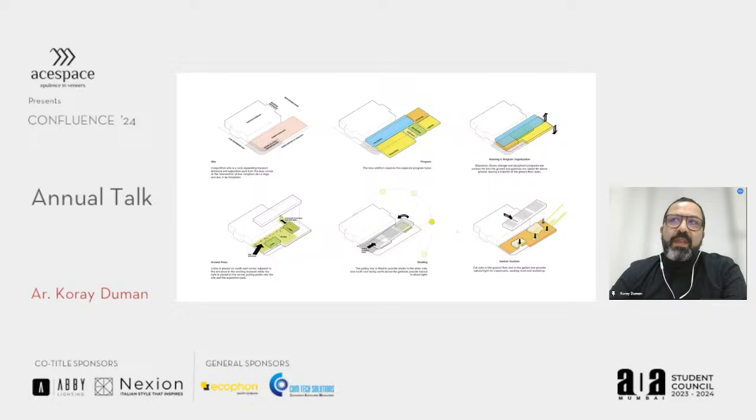Finally, we created sunken gardens into the basement so that natural light can reach the classrooms, reading rooms, and workshop in the basement programs.

This drawing shows the entire ground floor of the site as well as the adjacent park. The new design of the contemporary art wing provides a social landmark, a place for civic engagement, and a new kind of public space. We envision the ground floor as a collage of landscape and paving where many different public programs can happen throughout the day, with the galleries sitting above, creating shade for them.

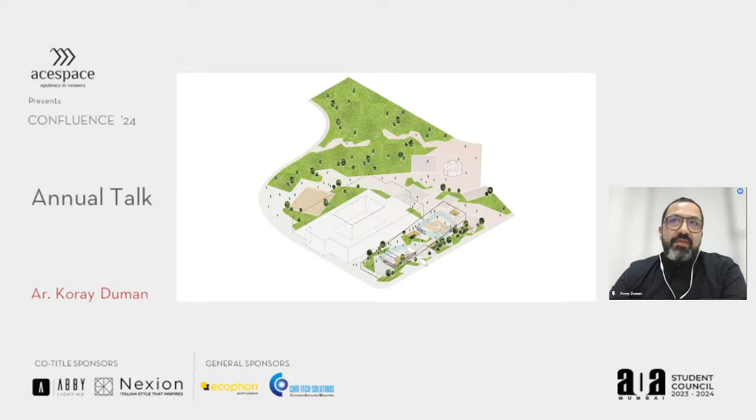What you see here are the floor plans. The one on the left is the ground floor. As you can see, the footprint of the museum on the ground floor is very minimal—these are sculptural boxes for the cafe, the multi-purpose room, and the entrance, with the entire space open to the public as an extension of the park.

The second image in the middle is the second floor, the elevated gallery box, which provides unobstructed spaces for contemporary art exhibition. On the right is the basement space, containing art storage as well as classrooms and education spaces, where sunken gardens provide lighting to the classrooms and educational programs.

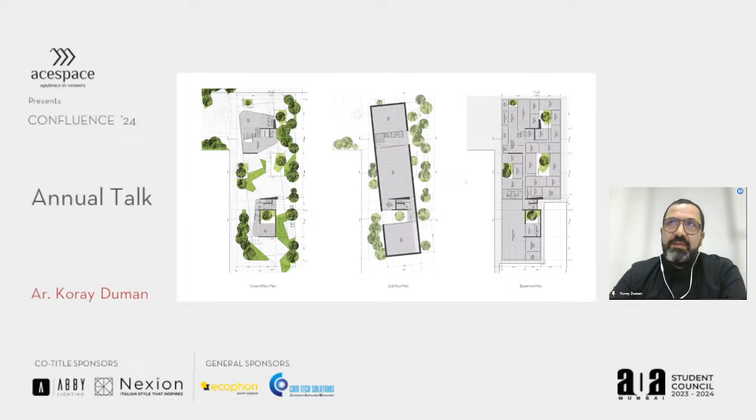The final design shown here is the view from the busy corner. On the left you see the existing museum, and on the right you see our new addition, where you can see the elevated gallery box and the public space extended underneath it towards the park and the entrance of the museum.

This other view shows one of the gallery spaces, with the north-facing sawtooth roofing positioned directly towards true north to bring indirect light into the gallery spaces.

Another competition we did was part of Europan 13 in 2015. The theme of Europan 13 was Adaptable City. The particular site is in Turku, Finland, and the site had an emphasis on densifying a 1960s housing area.

The site shown in the slide given to us is marked with a white outline. It's actually two sites interrupted by a continuous road—two corner sites proposed for this competition. The site is adjacent to the University of Turku, the student village, and a commercial center.

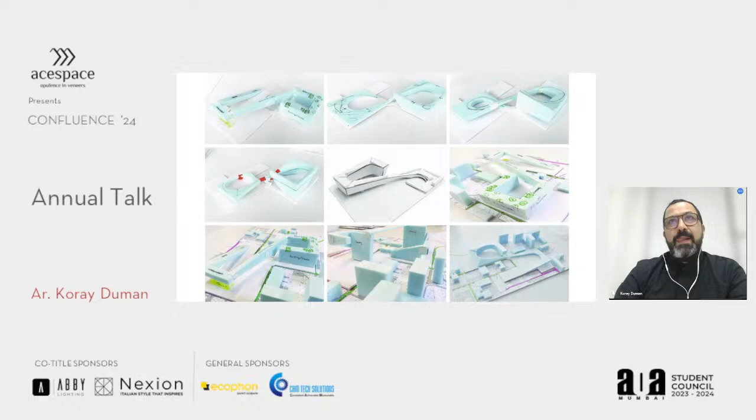I will maybe explain more here on this rendering. The project starts on one side at the ground floor as a big landscape that lifts up. And as the landscape goes higher and higher, it becomes the roof garden above the entire building. At the middle of the site, it turns into a bridge that goes above the road to create this continuous superstructure. The way the project works is explained in these diagrams.

The program for the project was to provide dormitory for students, housing for elderly, as well as a restaurant and public spaces in the ground floor, and educational programs for the study areas for the students.

The way the program works is that we place the family residence, which is for the elderly, in the lower volume on the bottom part of the structure, as well as at the end of the taller part on the other side. The darker gray area you see on this diagram on the upper left is occupied by students.

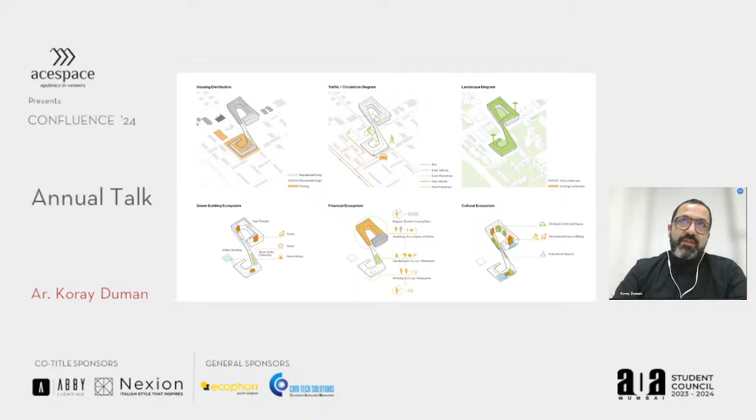The way the project works is that the entire roof is a continuous park where you can access individual floors through these roof terraces. It also provides a cycling path through the roof to each floor, as well as provides green roof space. The idea is that this can actually provide spaces to produce products for the restaurant and the urban farmers market that is underneath.

This was the final project for this competition for our proposal. And these are two views that show the project.

The top view is on the street level. You can see that the superstructure goes over the street, and the area that is the bridge is where the study area for the students is. The higher portion that you see in front of us on the right is where the elderly housing is occupied.

The bottom view that you see here shows the continuous roof that people can walk through into their apartments in each floor, as well as the greenhouses that will produce the products for the restaurant and the urban market below.

There is also the idea that the university was thinking about where if we were to put elderly housing with student housing, it might help in two ways. One of them is in Finland, in Scandinavian countries, they do multi-generational housing where the students take care of the elderly and make income from it, while they also learn from the experience of the elderly. So the university was looking at a combination of this multi-generational living that would really help both generations.

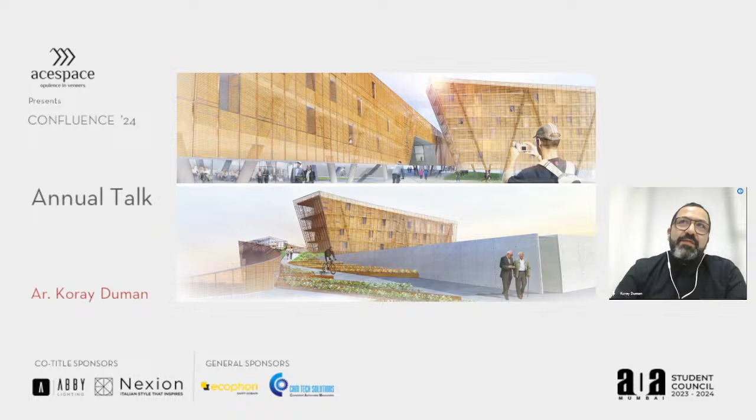Some of the things we found in 2016 were really interesting. One was that an average American adult spends 54 minutes a day commuting, and more than 11 hours a day staring at screens. They usually have 1.4 friends and 338 Facebook friends. Another interesting statistic from America was that American adults spend about 5.6 hours per day browsing images. We also realized that people can browse about 1,500 images per hour, and browse approximately 8,600 per day.

Some of the problems we realize about doing architecture in a global world, practicing in different places and doing projects for sites we're not really familiar with, was that we realized we are actually becoming part of this culture. What we were doing was not working on physical public spaces, but really producing images for the digital world and social media. This was also during a time, interesting enough, around the 2016 United States election.

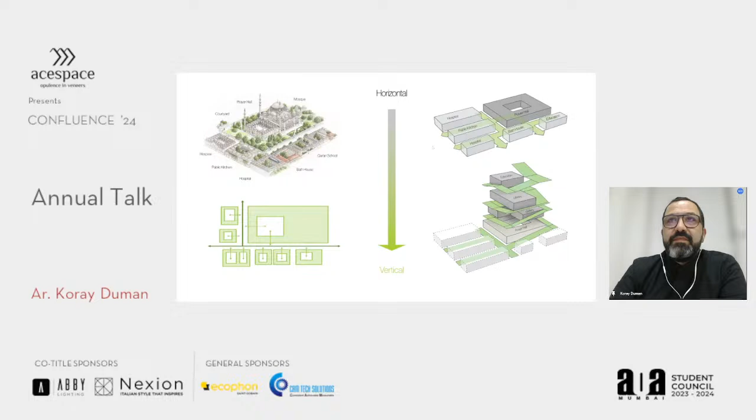The way Külliye's work is that each of the buildings is connected with each other through streets. If we were to take these programs and put them on top of each other and create a vertical street that goes around them, that might be a way of introducing a new kind of public space in New York City.

Another thing we did with this nonprofit is really look at what kind of programs they needed. It varied tremendously. They needed educational programs like nursery, preschool areas, classrooms, lecture halls, an auditorium. They really needed recreational spaces including dance studios, yoga studios, martial arts, gym, fitness areas. But they also wanted a culinary area with a restaurant and cafe, as well as cooking classes, and art, culture, and social programs providing contemporary art spaces, exhibition spaces, auditoriums, and permanent galleries.

We divided these spaces into two: informal spaces and formal spaces. The informal spaces are more public spaces where people can wander around, including cafe, restaurant, retail, exhibition, or the library. Whereas formal spaces are more defined spaces for one specific program, including athletic facilities, classrooms, offices, and so on.

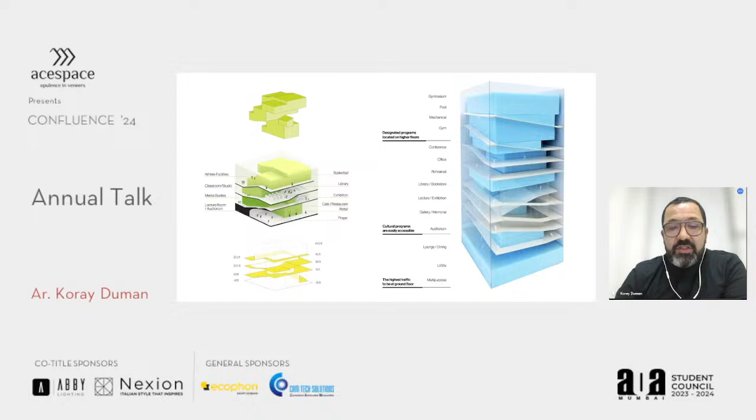The idea was really, how can we create a new kind of public space that will let people wander around, discover new things, as well as have chance meetings with fellows coming from other parts of the world who also share a common religion with you.

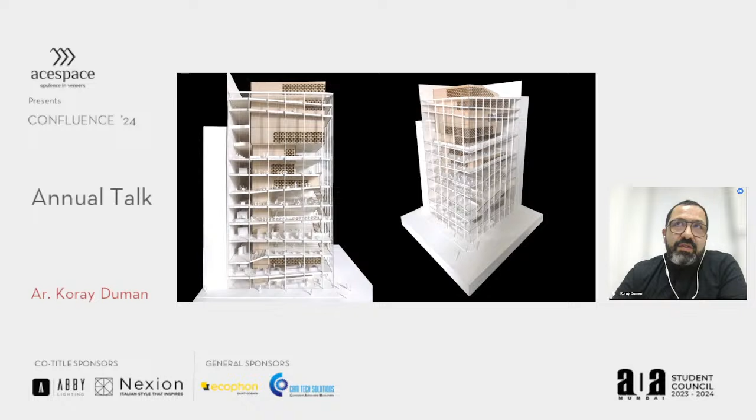This is the final project, the model. You can really see this informal space that wraps around the building and the transparency around it that shows the extension of the public into this vertical space. This is a detail of this informal public space that wraps around the inner walls.

Second project we did was called Under the BQE. BQE stands for Brooklyn Queens Expressway. One thing we realized in New York City, probably common in a lot of other big cities, is that New York has 300 miles of elevated infrastructure, usually for highways or subway lines. The ground floor space underneath this elevated infrastructure is usually used for parking or is no man's land. Even though people can walk underneath it, it also divides neighborhoods.

We realized the space underneath this elevated infrastructure has a lot of potential and is really an overlooked public space. We wanted to take one portion of it and do a test element. The BQE, Brooklyn Queens Expressway, is widest in Brooklyn where it goes through. We thought it would be really interesting to pick a site next to a big complex, the blue area you see here called Industrial City.

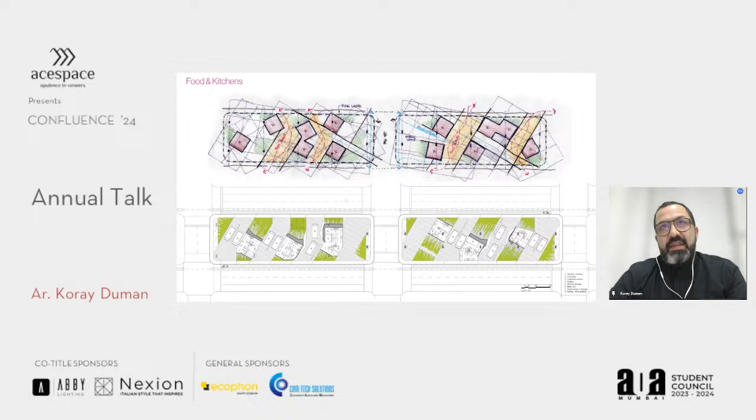One of them was to think about a floor plane that provides parking for food trucks as well as areas for commercial kitchens. The idea was that during the morning they will produce food for the food trucks, and when the food trucks leave to go to their destination during the day, the area that was for parking can turn into public space, and people who work around the complex can come to have lunch. So it has this double purpose.

The second project that we looked at was this as a sports complex. If we provide a gym and basketball, football areas for the neighborhood, that can actually be really useful in two ways. One is it can be used by schools during the day, but at lunchtime, in the morning and in the evening, it can be used by the people in the complex.

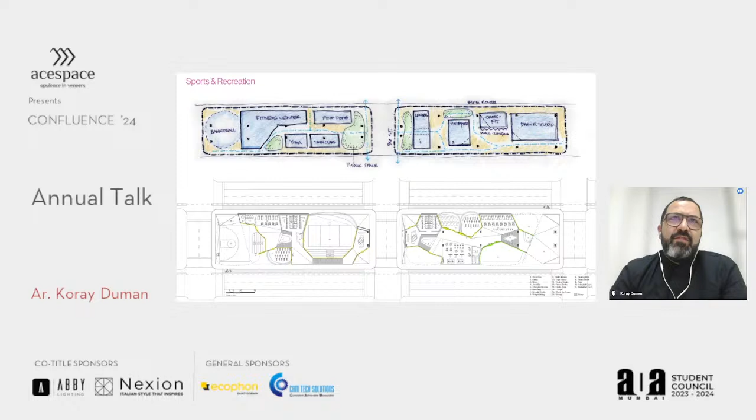And when we were looking at these, we also wanted to think about what are the different formal experiments that we can do that will help us think about new kinds of public spaces.

For the second proposal, we were also looking at the idea of a sport facility. One thing we realized is that if you do high intensity workout, because of the heat you produce, you don't need to be in a conditioned environment except when it's really cold, which is 2 months of the year. Besides that, if you have a covered shed above you, you don't really need an enclosed space to play basketball, tennis, or do high intensity workouts.

One of the ideas is that we create areas that are open most of the time, but also have these inflatable structures. So when it's really cold, these inflatable structures create heating, but otherwise it will just be open spaces for people to do their workout. There are other volumes that are more permanently enclosed for changing rooms, cafeteria, and also smaller workout areas.

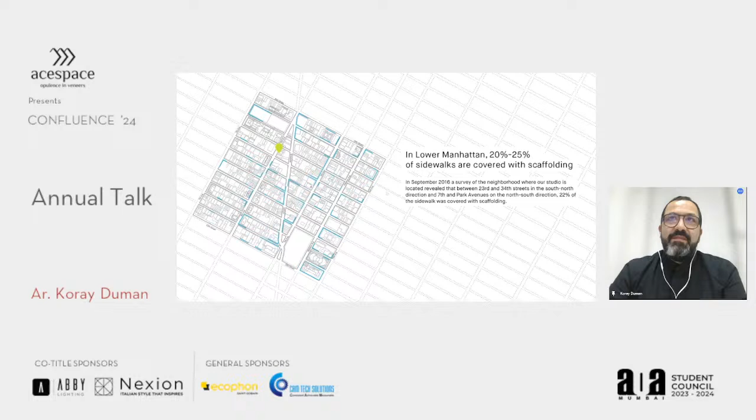But one thing we also realized in New York City is that scaffoldings are not only used for new construction, they are also used to inspect facades of old buildings, and facades of old buildings in New York City need to be inspected every 5 years. That's the reason why there's so much scaffolding in New York City, and sometimes these scaffoldings can stay more than a year or so on the sidewalk.

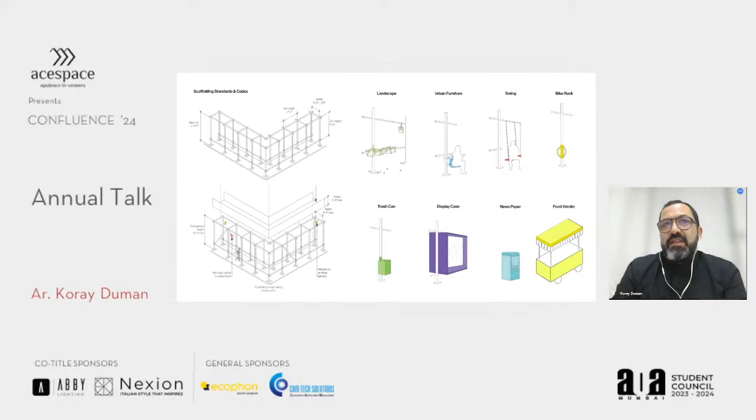So some of the things we started thinking about is, if we have to look at scaffolding, what are the other elements we can put into them? Can we provide landscaping, urban furniture? Can we provide bike racks or trash cans or even newspaper stands or food vendors? The project I'm going to show now is 2 options that look at alternatives we can think about for scaffold.

Some of the sketches we did were, what if we actually just use them as diagonals so that it will be much more efficient than the simple column and beam structure we have, but at the same time these diagonals can hold some public furniture. Or what if these are collapsible structures that don't really need to be individual elements, but come as sections that can unfold or fold back again quickly so that the assembly and disassembly time can be reduced.

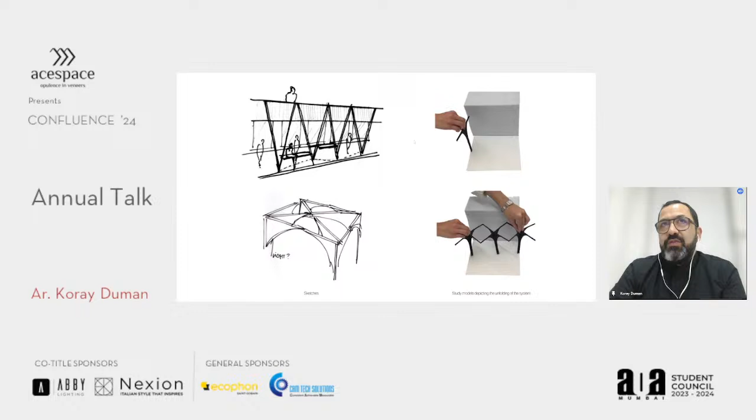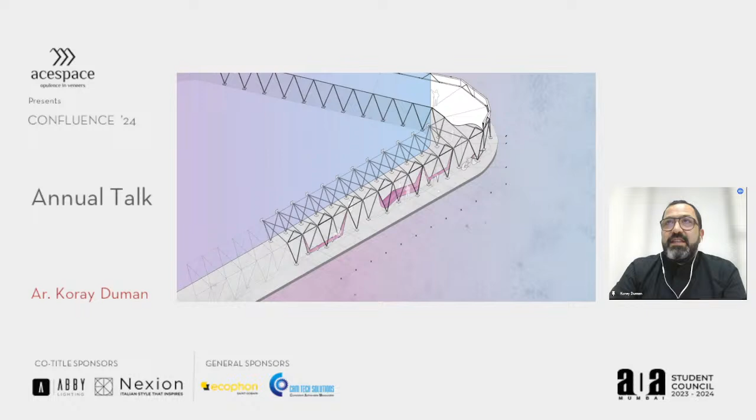So the first option you see here was the option for the diagonal elements. Here you can see how plug-in benches or bike racks or stands can be incorporated into the scaffolding to make it more of a public space for city dwellers. This is a view of the same one from the sidewalk.

And the other option is, what if it was these collapsible structures that really get support from the center, but can also be attached to the buildings or have secondary support on the sides. With these structures, another option beside benches or bike racks is that we started thinking about plugins that can be used, paper stands or other types of projects.

The interesting thing about all of these projects is that it started to give some recognition to the office. So we started getting invitations to propose temporary public installations in New York City.

This led us to start thinking about much smaller projects as well. Another thing I want to briefly mention is that this actually ends up really useful for the build projects we do in the office. This is a very small project we did in 2017, right after that research we did about it.

It is for a creative agency. This creative agency has a very small floor space, 1,000 square foot, which I believe is less than 100 meters square. They had a lot of needs they wanted to fit in: 12 desk spaces for 12 people, a private meeting room, a kitchenette, and a secondary informal meeting area. What we thought is, maybe what you see here is the plan, which is a long rectangle with windows on one side and a door on the other side.

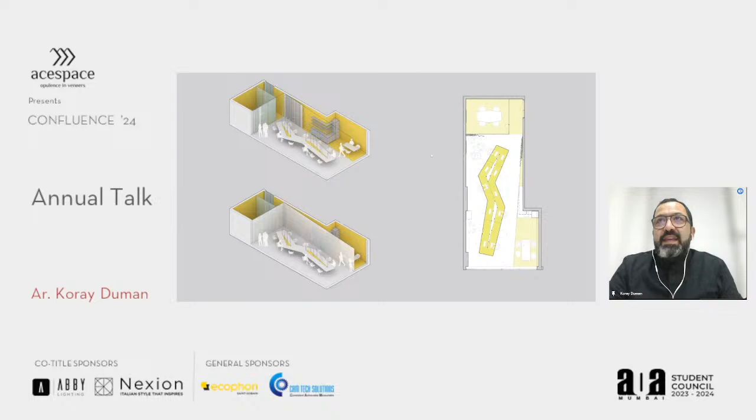And then we introduced two ideas here. One of them is that, as a creative agency, they didn't want to have a lot of clutter. So the main space actually has curtains that, if they want, can block all the visual clutter of the meeting room and the kitchenette area, leaving just the main space. And when they want, the curtains can move and it can be a whole open space.

The other idea we had was the desk for the space was going to be so big that what if we use scaffolding poles to float this table so it just looks more ephemeral and light. These are images of the final space. These scaffolding poles actually not only structure but the electric goes through them into the middle, so that any electronic equipment on the table can have access to plug in.

The other kind of thing we started thinking about after the scaffolding was this idea of a modular structure that's almost like an infrastructure that wraps around, that can be used for various different things.

One project during that time was also a cafe in downtown spaces. They wanted to extend this and have it fit into different places. The other idea about the modularity was that this modular structure can also be adapted to different things they want. It can be used for lighting, planting, but at the same time for merchandising, as well as other programs like storage and pickup.

This is the floor plan. This structure was installed in an existing space. It's a grid, as you can see, a modular grid, 3D Tetris that starts at the wall on the left, where you can pick up your food or there's display and storage, but it goes over you and comes down as a folding table for sugar or cups or utensils. This is the infrastructure, this 3D lattice infrastructure that we inserted into the existing space.

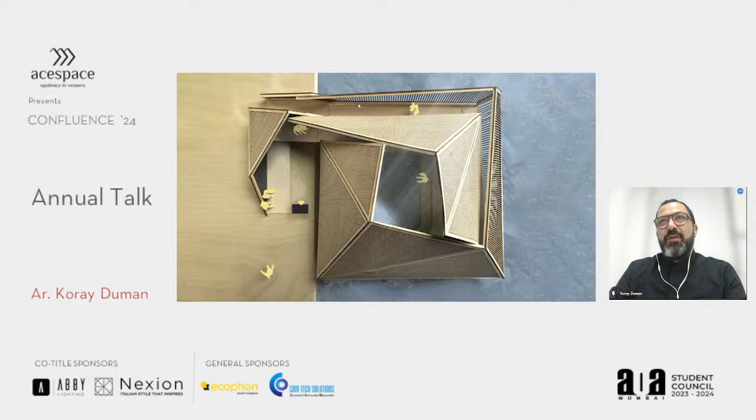This is the side view, and this is the bird's-eye point of view. When you enter the space, all you see is the sky and water. But as you come out of it, the view starts to open up, and as you walk out, you start to see the city and reconnect with it.

The last thing I'll talk about briefly is that some of these design research projects and proposals about public space have been going on in our office for almost 10 years now. But of course, we have another side of the office that does a lot of arts-related spaces: galleries, artist studios, design space, creative agencies, as well as exhibition spaces.

The thing that was always kind of interesting and difficult in the first six or seven years of our practice was that these two parts of the office, even though they sometimes overlapped, were distinct: the build projects and the research projects didn't necessarily always talk to each other. So I want to show two recent projects we are working on.

They are both museum projects in New York City, but they start to think about public spaces in a different way. The first one I want to talk about is the Noguchi Museum, built by Isamu Noguchi, the famous sculptor renowned in the 50s, 60s, and 70s for his public sculptures. The site is in Queens, across from Manhattan.

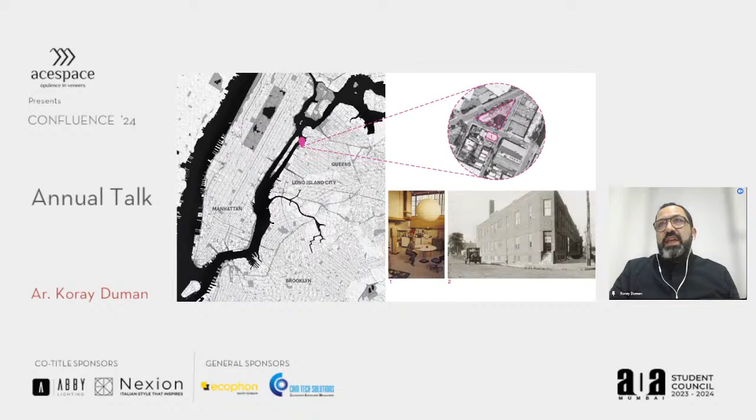So the competition was to build an art and archive building where they could bring the collection back into the museum again.

This is the existing museum, and this rectangle is the existing studio. Our proposal was really to respect the original architecture of the museum and the original architecture of the studio. The museum is very simple.

Isamu Noguchi really designed the museum to use readily available materials—CMU, corrugated metal, steel. That simplicity, and the way it was put together, was very important to him. We wanted to keep that in the new proposal.

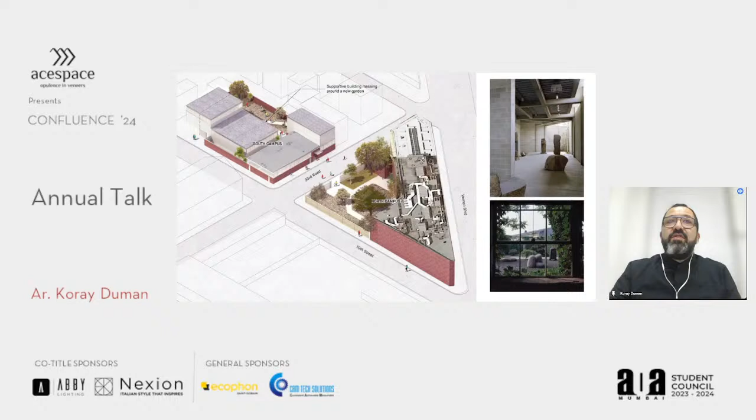The second thing we wanted was for the new building not to look entirely different or like a new addition. One idea was that there is an existing brick wrapped around the existing studio. We extended it on both sides of the building, and slid our building in between those brick walls so it felt like it belonged there.

This is our final proposal: this corrugated building, the existing studio, and the brick wall extending. The top floor is the archive area for education and a research center, and the bottom is the storage.

Our proposal was to renovate the studio so it could open up as a multi-purpose space where the cafe and bookstore will be, a flexible space that can also serve other purposes. The interesting thing about this project was that once the museum realized they would have a big building that is basically storage.

But it can't be hidden away like it used to be in the basement—what could we do to bring new life to this building so it works as more than just a storage space on the ground floor?

So one of the things we worked on with them is that the entire storage space on the ground floor is actually movable—it's on tracks—so it can open up to create events or lectures and talks inside the storage space, and also bring people into the storage space itself.

The studio itself is also a space where we kept the existing skin of the building, the CMU walls and the steel structure as is, but introduced corrugated metal panels that can be used in many different ways, so that it's purely flexible.

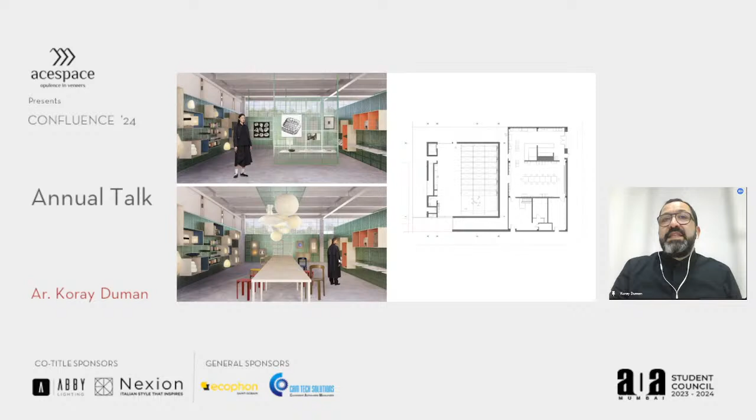It can have boxes installed to show his lamps and furniture that he designed, but it can also become a space for exhibition, or a public space for a cafe, talks, or lectures. The last project I want to briefly talk about is MoMA PS1.

MoMA PS1 is a museum in Long Island City, across from Manhattan. PS1 comes from public school. The building you see here was the first public school of Queens, that's why it's called PS1.

It was abandoned in the 40s, and in the 60s artists started to occupy it as studio spaces. They produced work, they exhibited work here. It was really a ground-up, guerrilla-style exhibition. The city recognized the power of it and gave money, and in the 90s it was renovated into a proper museum.

During that time, the back courtyard, what used to be a parking lot, turned into a series of concrete courtyards that artists and creators can use to exhibit work in the space. In 2000, it was associated with the Museum of Modern Art, becoming an annex of MoMA, so it's called MoMA PS1.

One thing that happened during COVID was that the museum realized they were incredibly detached from the neighborhood because of the architecture. It was covered with concrete walls, and the neighborhood didn't even know there was a museum there. People also felt like when you go inside, it felt like a prison courtyard.

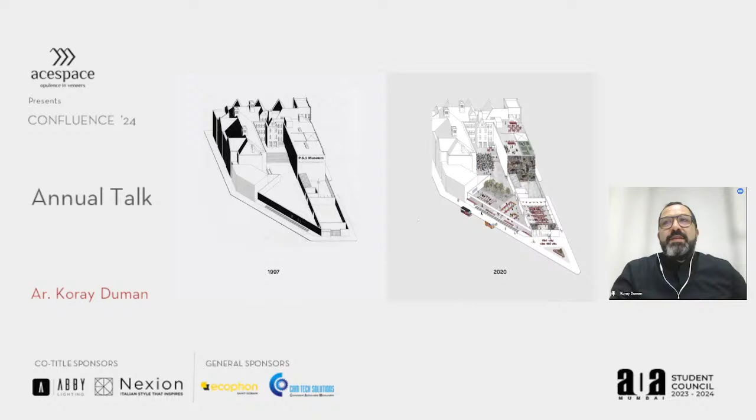From this collage, we are now working on a concept design with the museum. A couple of things we are doing: the entrance will probably be turned into a living room for the neighborhood, with a cafe, almost detached from the museum with separate operation hours. We will also penetrate the concrete wall, installing gates that open it up during the daytime.

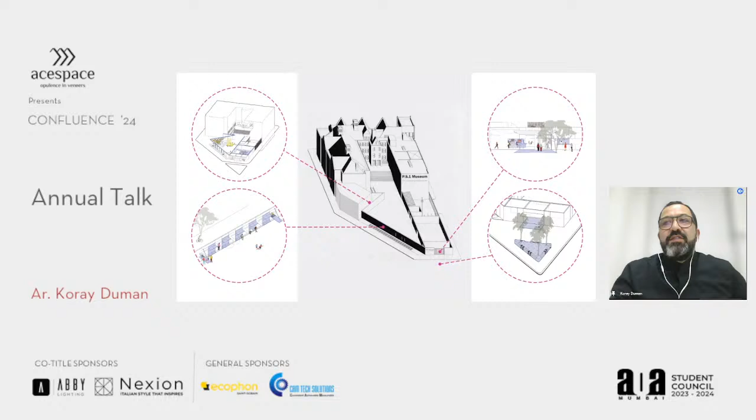The gates themselves will also be furniture. When open, there might be seating, bike racks, or tables so people can occupy it. We also want the museum to extend beyond its walls, occupying the public space in front with more opportunities for seating, bike racks, and public spaces. This is the current scheme we're working on with the museum that tries to activate the space.

One of the things we're also doing is providing a bespoke metal cap above the concrete walls, custom designed so hooks can be installed for shading during the summer, while also providing electricity for lighting or projectors.

The piece itself is very surgical, very small, but it will allow creators to install projectors so they can provide screenings or other programs, so that the courtyard, the front pavilion, and the space in front of it really start to belong both to the museum and the community.

This is kind of all the projects that we had that I want to introduce here.

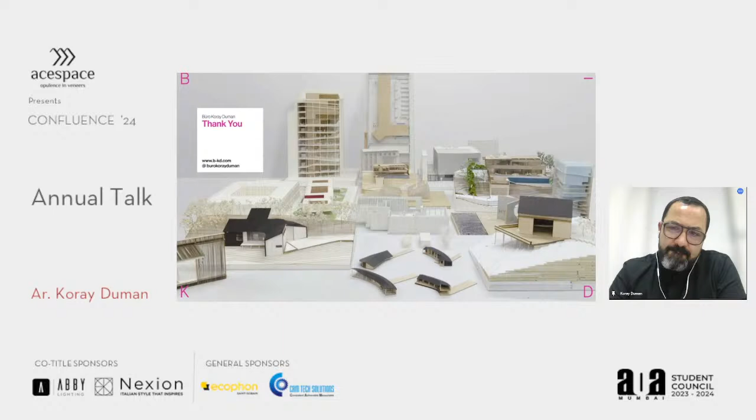Yes, so we will be ending with the questions here.